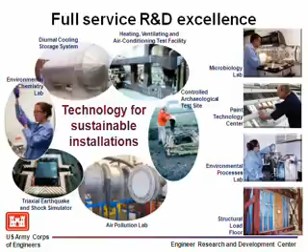CASI was started in October 2006 to support the Army strategy for the environment. There was so much going on at CERL, and there was a real need for embedding this into the Army. So it's the Center for Advancement of Sustainability Innovations. I'm Center Knowledge Engineering, which I've got the website, and I talk to a lot of people, I guess. Bill Goran's our director. I don't know if you know him. Michelle Hansen's the associate director.

We have an Army definition of sustainability, and they really are taking this seriously. This was a definition that was created in 2004. So in 2007, the Army Strategy for the Environment won a White House Closing the Circle Award. And the goal is to foster a sustainability ethic and really embed this Army-wide and to create policies that do that. And you've heard of the triple bottom line. Our triple bottom line is mission, community, and environment.

We have an Army energy strategy. There's a lot of work in saving energy. We have so many facilities. And also, we use a lot of fuel when we move around, too. Microgrids is one of the really big work efforts. I'll talk about that a little bit. There's a new strategic plan for Army sustainability. And we're trying to get that into the Army. There's a leadership school. We get a lot of the different leaders through to teach them about sustainability.

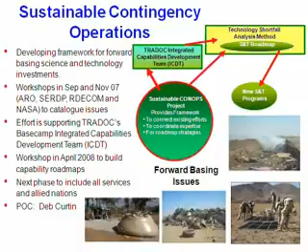There's a real need to do this differently. About everybody in the Army's been deployed once or twice, and they see a lot of problems with the way we're doing business. And there's a big effort to change and be more sustainable. You know, energy and water are big problems, and sewage.

Sustainable water resources. Elizabeth is the lead on this. One of the projects we have is to look at 30-year water sustainability at Fort Bragg and Fort Bliss, to look at how will demand increase, how does the population increase, how do we apply technologies to save water, what's the region doing. The Army's adopted, for instance, waterless urinals for all new projects. How does that affect? How many buildings can you get those into? There's a lot of water modeling going on with this effort.

This is the one I have a hard time explaining. So I have a sentence for you. We're shifting to a trading framework of credits: carbon, habitat, water quality, and wetlands. And that's already affecting the military conservation easements. So CASI's helping the military prepare for this change. So this is a new research area that's got a lot of growth potential.

There's an effort to deal with climate change. There's an interagency working group. Bill Goran and somebody from NASA are co-chairs on that. They meet every other month in Washington, D.C. They're looking at how will climate change affect the federal government, federal facilities. What do we do to deal with climate change? How do we have policies to help out with that?

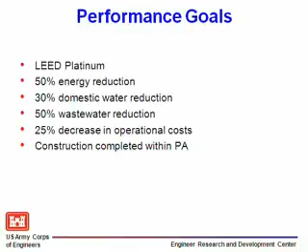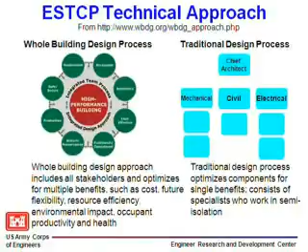The whole building design is a team effort where everybody has to talk to each other and you get better sharing of ideas, you get a better design than the typical process where somebody draws the plans and then they give them to the engineer to do the mechanical, the electrical. We had a 4-day charrette at Fort Bragg. This is our customer, the firemen.

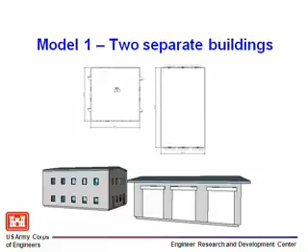Now, for Fort Bragg, North Carolina, which building would you think would be most energy efficient? You have to answer me. This one? Yeah, sure. That's what I thought, but that's wrong. This was the most energy efficient. It must be because of the cooling. I don't know. Anyway, we started the charrette with this.

We found that we could not convince the firemen to have a 2-story building. No way, no how. They weren't going to go down the pole. They have a minute response to run out and be in the truck. So the charrette, the basic plan is a high bay that they can drive through. I should say the building has a fire truck, a police car, and an ambulance.

The sleeping rooms are up here on the north side. This is the entry, the public space, reception. This is the firemen's day room where they can eat and cook. Interestingly, there's a lot of fires in these kitchens. A lot of them have huge smoke or fire suppressors because they're cooking up something and they get a call and they run out. So these are some of the offices.

There's a holding cell here for people that get out of control and they have to go capture them and put them in the holding cell until they chill out. These are the restrooms. They always have a fitness facility, a training room. This is the mechanical room. So that's about the basics.

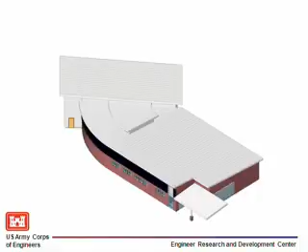The architect did a bunch of different roof scenarios, alternatives. Here's one of them. Oops, let me go back. So south is this way, okay? Here's another one. When we did the energy modeling, it became apparent they weren't getting the LEED daylighting credit because the interior spaces were all dark. So they started putting in skylights.

This one was kind of fun. This was the celebrate the rainwater collection roof. You know, like this. And we're going to collect all the rainwater and wash the fire trucks with the rainwater because that's a process load with a lot of water use. Well, the guys at Fort Bragg just went nuts. They did not want to collect. That looks like a roof that will leak. Okay, so that got voted down.

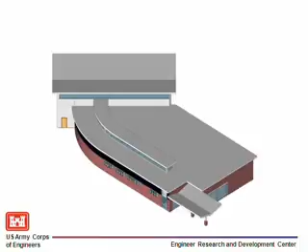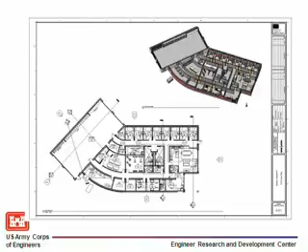This was another alternative with the clerestory. And then this one faced south. The high bay skylight faced due south. So we kind of all talked and voted on these. One of the benefits of using BIM is you can just take floor plans, elevations, sections through the building, and just create these drawings because you've got a 3D model already. So these are some of the drawings.

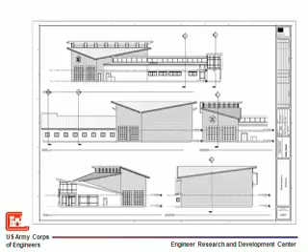It's quite an eye-catching building. One of the benefits of building on the north side of Fort Bragg is it's not by anything else it has to look like. It can be creative. So you can see the high bay in the spaces.

So these are some of the technologies we used in the project. Insulated concrete forms. This saves a lot of energy. You can have a really efficient wall. You just set up the forms and pour the concrete in.

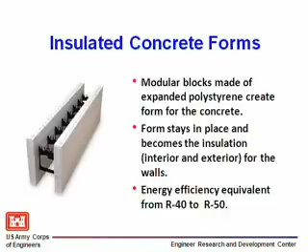Oops. We were trying to do geothermal heating. I don't know if this ended up in the final project. They're still debating the energy system. They've got alternatives, and whoever builds it gets to pick it based on cost. This site is an all-electric site, unless we use propane. There's no natural gas there.

We're going to do solar water heating. It's cost-effective in this application because it's a residential use, too. We've got those people sleeping there. And it saves a lot; estimates showed 5% energy savings for the entire facility.

This is one of the things afterwards I kind of decided I don't like. We're using solar walls. These are solar walls. So they heat up the air behind it, and then you can blow it into the space. So on the elevation, you see that black line around the south. That's the solar wall to heat the high bay, which sounds good until you think, well, they're going to open the door and all that hot air will blow out.

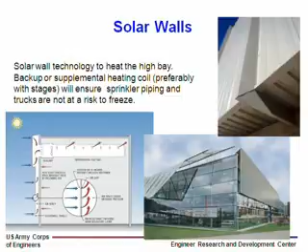So the guys at CERL told me we should have used a radiant floor instead because that would keep the people warm. We use these a lot, though, on mechanics shops, maintenance shops in the Northeast. Was that heating the whole center? Could you still do radiant floor, or is... I couldn't get that into the project effectively. One of the lessons learned was I gave them a really thick document and they didn't read it, but the people that researched the little technologies that gave them short, tasty, little cost-effective ideas, those got implemented much easier.

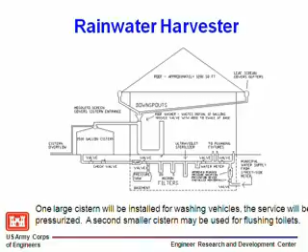We're going to collect the rainwater. We tried to have 2 cisterns, one for washing the fire trucks, one for flushing the toilets, but it ultimately ended up 1 cistern just for the fire trucks. Because you don't have enough... Partially that and partially cost of the redundant systems. There was value engineering that occurred at the end of design.

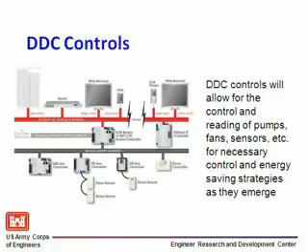We're going to use DDC controls. There's a network on base to control the buildings. And this helps us monitor the building and compare it to the existing building. That's direct digital controls if you're not familiar.

This is a site plan. And at one point, the civil engineer came running in all excited. And he wanted to scoot the building. It's kind of up on a hill, okay? So the fire trucks would drive in and then drive through the high bay and out onto the road. And the residential area is over here. And this is kind of a public road over here. And this is the visitor parking with the visitor entry. So once we moved the building a little bit, he had a lot less cut and fill to do, so it was more cost effective.

And that's part of the whole building design, having everyone in the room. The architecture firm had a cost engineer, mechanical engineer, lighting, civil, the BIM guy, the LEED. There was a couple other people. There were 10 LEED accredited professionals in the room because we all descended upon this. But they were very nice to us. Everybody was in the back researching. They'd come up with some problem and somebody would be researching it. It worked really well.

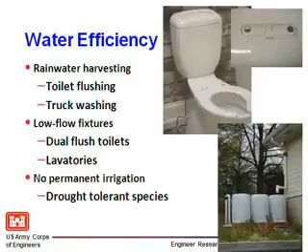These are some of the other credits we're getting. This is sustainable site credits, bike racks, cool metal roof, bioretention on site. Water efficiency: there's no urinals in this project, so we're going to use dual flush toilets. Have you seen those? They have a big flush and a little flush. Low flow fixtures, all drought tolerant species.

Geothermal heat pump, although I'm not sure if this will end up with this. We'll have the solar wall, solar hot water. It's really a good passive design. We tweaked it during the charrette. I'll show you the energy models.

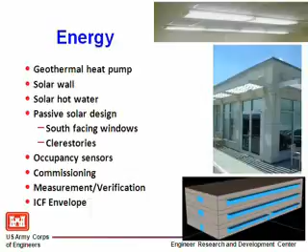Occupancy sensors for lighting. And you have to be real smart with these because there's daylighting sensors, there's occupancy sensors. And this is a 24-hour occupied building. So you have to pick the right sensors for the right rooms. Commissioning is really important to get this to all work right. And then the ICF envelope really made a big difference. Insulated concrete forms.

Materials, we had to be really strategic. We're trying to get to LEED Platinum. Like FSC certified wood doors, we can get that credit. If we don't have too much wood in the building, you can afford it. If we have wood trusses, there's no way we can afford this credit. Rapidly renewable materials, we can put cabinets in the kitchen and linoleum floors, and that's enough of a budget. So you have to take your building budget and compute the costs of these different parts to get the credits.

Construction waste management is a really big deal. There's an Army policy. We have to recycle at least 50% of it. Fort Bragg has a stockpile. When they tear down old buildings, they take all the concrete, they grind it up, they reuse it. They stockpile topsoil, they stockpile all kinds of stuff. They're really good about this.

Indoor environmental quality, you have to cover up the ducts. You don't want people throwing their pop can in the ducts during construction, and then it stays in there. We're daylighting the spaces. A lot of emphasis on controllability of systems. Operable windows. You won't believe how much of an argument we had to put operable windows in. A lot of Army people think there's force protection rules to not have operable windows. And the argument just goes around and around.

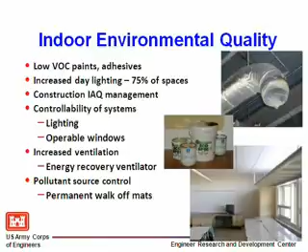Innovation and design, this is another way to get to platinum, is to get all these credits. Process water reduction, that's washing the fire trucks with the cistern water. All light colored hardscape. 40% water reduction.

The building's an educational tool. We set it up so we can take tours through, and they can see the mechanical room. There's windows into it. They can see where the air comes from the preheater to the high bay. They can see the solar hot water system. You can see the cistern. There's a lot of kids that go on school tours. We're going to have some cutouts in the building.

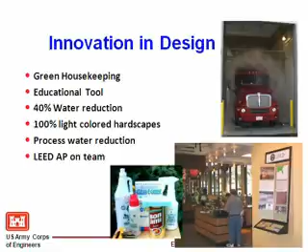There's several LEED APs on the team, so we got that. So at the end of the charrette, we had 57 points. That's a lot. Now, this is 35% design. So energy modeling before the charrette, we did the underground and the 3 other alternatives I showed you.

Now, there was a big push by a couple people at Bragg to build an underground building using 18 Connex trailers, you know, the old shipping trailers. Okay, they want to be leaders in sustainability. Can you imagine the space you get from 18 trailers under the ground? We're like, they're going to rust. Oh, you could put that rhino skin on them that you put in the back of a pickup truck. We're like, why don't you try this on another project? So we managed to get a nice design.

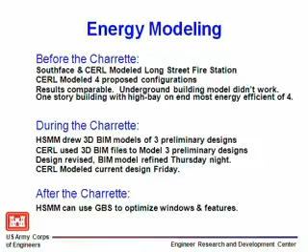During the charrette, we took the 3D BIM models. It took about 2 hours per design to fix the model enough to do the energy run. Because the architect was designing them to look right, but all the spaces, the volumes weren't closed. He had furniture in there. He had parts we don't need to do the energy model. So Hanju Kim sat and fixed the models, and then we could just export the gbXML and do the energy run. So we did the 3 preliminary designs, and then we did the final design.

And this is what it looks like in Green Building Studio. You can see the building. You can spin it around. You can click on walls. You can see where they are.

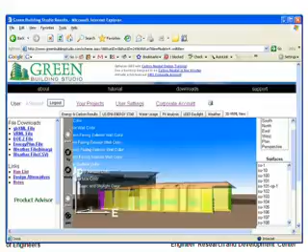GBXML is Green Building XML, and that's the file format that you're going to get out of your BIM tool to put into the energy modeling tool. And you can see all the runs. You can see the fuel cost. It also has a carbon footprint. It's really interesting. It's in terms of Hummers. It's 15,000 miles driven in a Hummer, so you're comparing your buildings. This is a 5 Hummer building versus a 3 Hummer building. It also models all the PV surfaces possible because it's 3D, and water.

So we did our energy modeling against the base case, ASHRAE, and we picked a whole bunch of options, and these were the best ones. So then for each of the 3 buildings, this is a chart that shows the 3 original alternatives, and this is the final building. This is the energy used by the base case for that configuration and the one used by those features you just saw in the previous slide. And we got down to saving 40% of the energy over ASHRAE base.

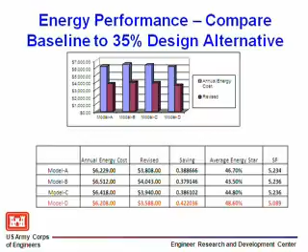Did you say cistern? Yeah. The water is stored up there. And if there's glass on the side? No, they took the glass out. We argued about that. Actually, this has been redesigned. You have to realize we were in a hotel all week next to this brewery pub that had the big cistern showing. You've been there, right? So we thought, well, let's just celebrate the cistern. People have to walk under it. It's part of the building as a learning tool. But it's raised for static pressure, is that the reason?

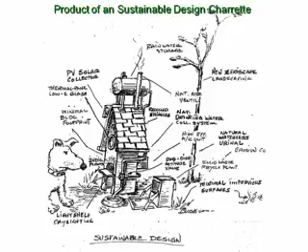We had meetings with the lead AE, the architect, to decide how do we interact with their team, because they're under contract with someone, and that's their rule. But they were really inspired to try to get on a LEED Platinum project, high visibility. So I suspect they may have invested a little marketing money, if you will, to this.

They brought the BIM guy. When I was in the preliminary meeting, I'm like, oh, I could do this BIM energy project if you bring a BIM guy. So we tried that out too. They were very receptive. And they got a lot of information before the charrette so they could kind of get used to it and think about it so they could come in prepared, which is another lesson learned. Because I don't think in normal charrettes you'd come up with all these ideas to get a LEED Platinum. Do you have any other questions?

Yeah, I have a question. Describe a little bit more of the relationship between the architects and the engineers. My experience has been with this building where the architect was actually the lead. And my understanding is normally the engineers are the lead. But it just seemed like in your case, I don't know who was really the final decision maker and in the lead. But what I really wanted to ask you about is, doesn't it seem like it'd be easier to try to find the most energy efficient mechanical systems and then design around that? But this seemed more iterative. So how would you recommend somebody do this in the future?